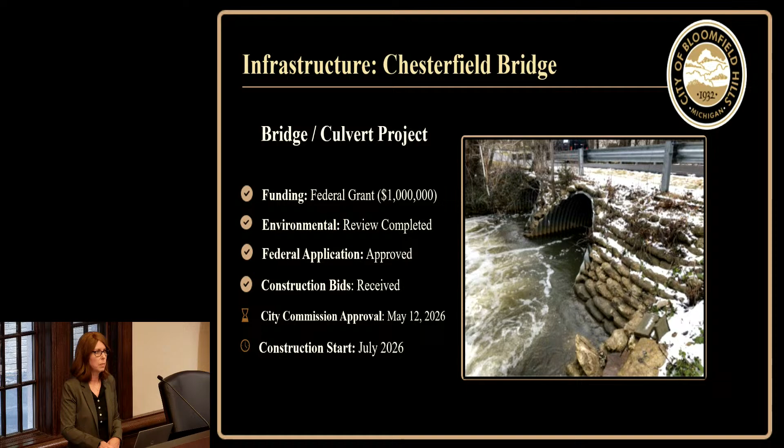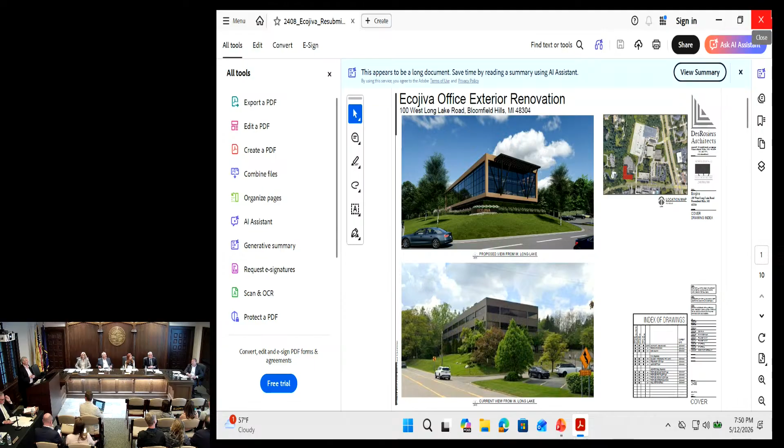These are going to have all insulated, beautiful insulated glass, which will have total energy efficiency. It's a curtain wall. And then the perimeter that you see, the tan color, is actually Alucobond. All these products are guaranteed for life.

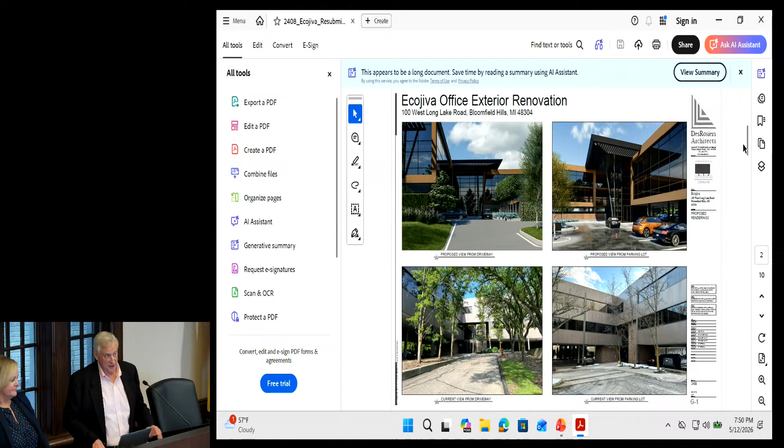And I always say that with a joke, because for some of us, life is different. I'm just kidding.

So we have these beautiful louvers that correct the architecture. The whole idea was to bring this building into 2026 veneer, and in my agreement with my contract, I'll never forget when I wrote it to the owner, I said my goal for you is that when people leave this intersection, they only remember this building, which is a good sales pitch.

Anyhow, so before, you can see the pictures on the left, we were very careful to show before and after. So these are the new views. It's a brand-new atrium, three-story atrium, all glass.

I think there's not too many other shots, we don't want to confuse anybody. Those are the same views before, and you can see that. But the building is the exact same use, same plan, nothing's changed, except we hope to lease it out big time, as soon as possible.

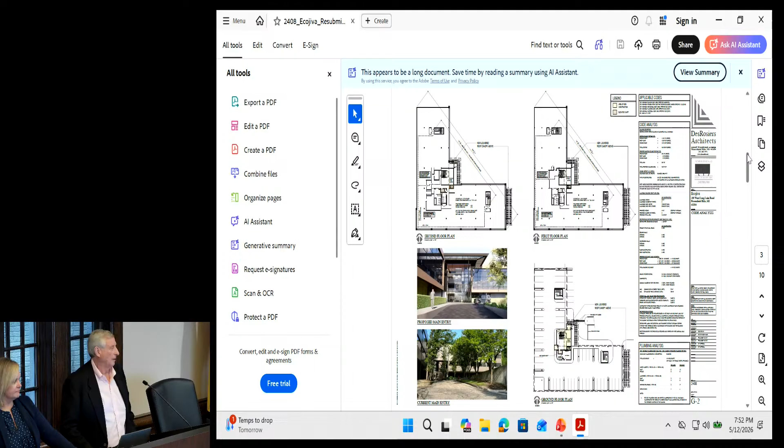I have a question. Sure. You're adding some floor space. We actually added no floor space. It's 40,000 square feet, a little bit in the atrium. But what is that, won't be used for office space? No, that's where you'll enter the building. Oh, we also added a brand new elevator, it actually has 2 elevators now, which is great.

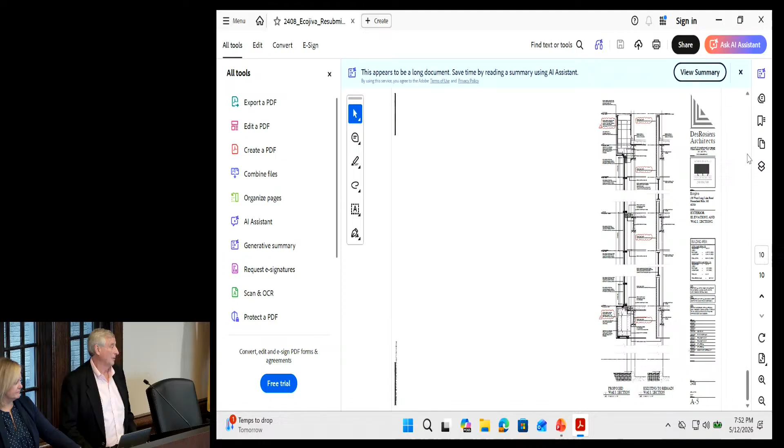So we're just hoping that everyone will work with us and want to make this an exciting part of your new, I call it rejuvenation venture, because that's what I think you're trying to do, based on all the things that happened through COVID and so forth. It's amazing, so we hope that you'll work with us on this.

Do we have any questions or comments? No, I think it aligns well with the spirit of what we're trying to do, and it's an existing use, and I really don't see any issue with it. I agree.

You know, that building is built for some smaller office. That building will fill up in a minute, it's over 40 years old. Yeah, because there's the JFK building to the north, which is empty, that's the one with the broken windows where the birds are running into the windows. And this is exactly what office should be like in town.

I appreciate it, thank you. That's our goal. Do we have a thank you.

Motion in response to the petitioner's request for a waiver from the moratorium for an architectural and facade improvement to an existing structure located at 100 West Long Lake Road? Do you want any comment first to see if anybody's got a comment? Does anyone in the audience have comments? I move. Second. All in favor?

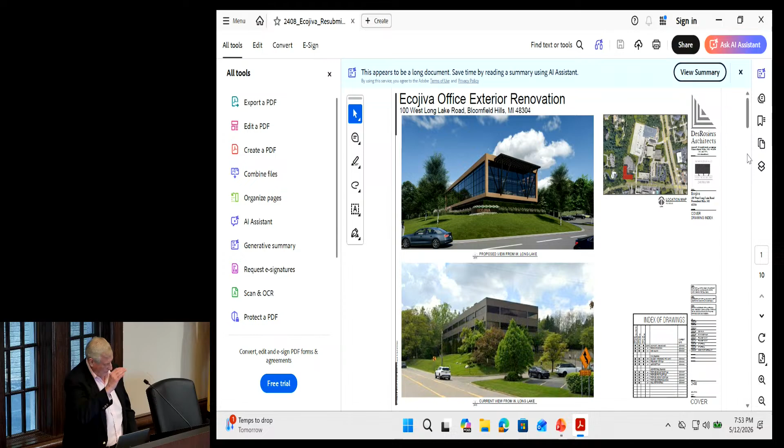Aye. Thank you very much. It's a pleasure, good luck with your project.

That brings us to item 6. The commission will hear a presentation from Oakland County Road Commission regarding the Lasher Road and Hickory Grove Road intersection. Dave? Looks like Jeff O'Brien and traffic engineer Alex Rosinski are here to discuss some options of improving the corner at Lasher and Hickory Grove.

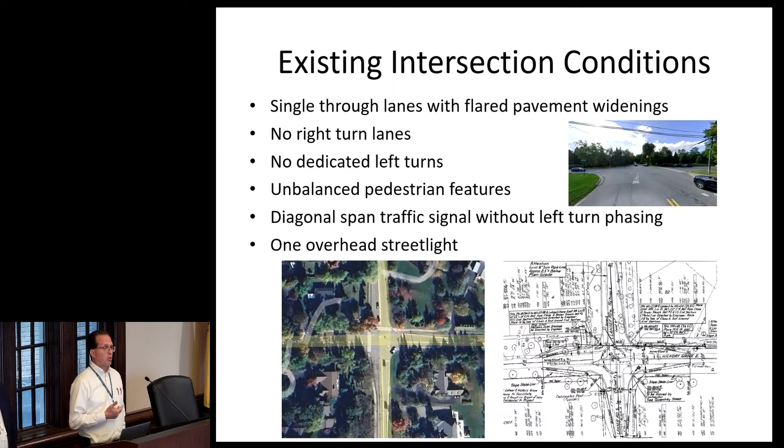It is a diagonal traffic signal today, essentially just red, yellow, green, with no left turn phasing at the intersection, and there's one overhead street light at that intersection.

The issues here at this existing intersection, from reviewing the actual operations, we observe a left turn crash pattern—northbound to westbound and westbound to southbound type crashes. These left turn or angle, head-on type crashes are the worst sort of crashes. Folks can come through on the green and strike a left turning vehicle, creating potential for higher injury type crashes.

We've had some reported intersection queuing—queues from eastbound Hickory Grove in the AM peak, and southbound Lasher in the PM peak. Some approaches queue up during those peak time periods, morning or afternoon. There are also reports of some cut-through traffic in nearby subdivision roadways.

The old signal today is a diagonal span signal, and it's not the current standard. That's partly from a worker safety perspective—workers need to get physically into the middle of the intersection to service the signal—as well as from a visibility perspective for the motoring public and pedestrians. This signal just isn't in the right spot visually.

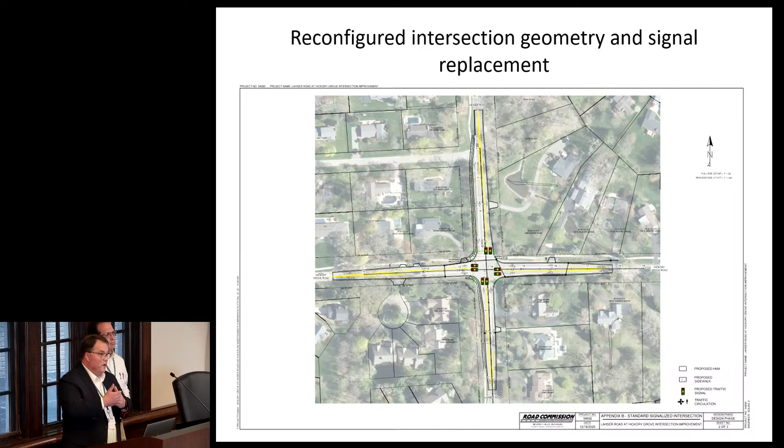That box span signal reduces red light running at a signal. People see it further away, and subconsciously they start braking before they get into that intersection, which helps reduce that red light running. RCOC made that choice roughly about 20 years ago to start installing box span signals.

Getting into some more of the details with that reconfigured intersection geometry, we estimate roughly 200 feet of storage. Once we get into the design, if this is the chosen alternative, we'll make the determination of how much left turn storage length is needed on each approach leg, based on full intersection turning movement counts and that type of operations.

We are not planning on having dedicated left turn phasing, meaning there will not be a left turn arrow at this intersection. We don't estimate that the demand is sufficient enough right now to meet that. We'll evaluate that once we get turning movement counts, but right now we are not planning on having that.

So you're having a left turn lane, but no left signal? Correct. It will just have that sign with the left turn only, and people will turn into gaps at that intersection.

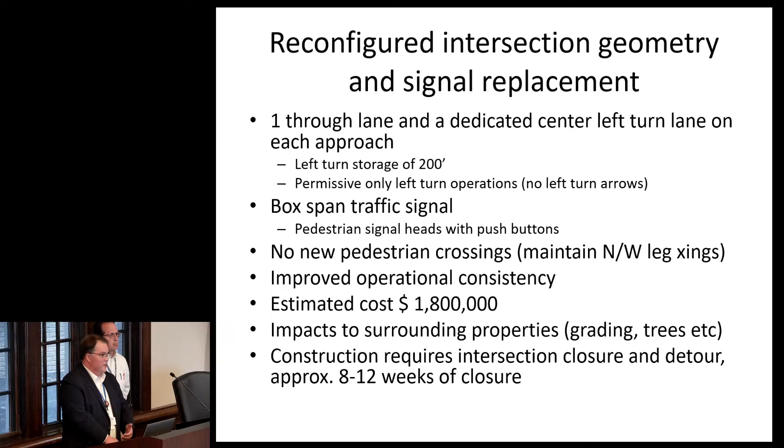The next option is a compact roundabout. This option puts a small island in the center of the intersection. You will have divider islands coming into it. It is a single lane roundabout. That center island is a small raised pavement area that large vehicles, articulated vehicles, and school buses could mount to complete the circular motion to make what we would consider a left-hand turn. That is how that is designed on these compact roundabouts. They're designed to reduce speeds through the intersection to about 15 miles an hour—no different than any other larger roundabout, just in a smaller configuration.

Like I said, single lane roundabout, it will remove the existing traffic signal. This entire project would remain inside the existing footprint of the intersection. It would utilize the same drainage system that's out there today. It slows traffic speeds down through the intersection. There are no proposed new pedestrian crossings. The crossings on the north leg and the west leg would remain. Obviously, we would bring those into ADA compliance. It improves operational efficiency through the intersection—that's the big plus of a roundabout versus a traffic signal.

It minimizes impacts to the adjacent properties. The estimated cost is about $525,000. It would require a closure and a detour as well, but we estimate the construction time is about 6 weeks.

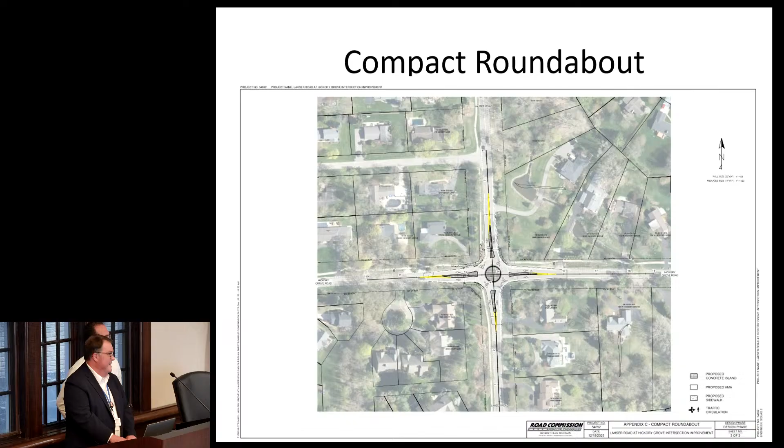One slide I like to present when comparing a roundabout to a traditional intersection is conflict points. At a traditional intersection, there are 32 vehicle-to-vehicle conflict points, and 24 pedestrian-to-vehicle conflict points if there are 4 crossings. This particular intersection only has 2 crossings, so that pedestrian-to-vehicle conflict gets reduced to 12. Compared to a single-lane roundabout, there are 8 vehicle-to-vehicle conflict points and 8 vehicle-to-pedestrian conflict points. Again, with 2 crossings here, that pedestrian-to-vehicle conflict point gets reduced to 4.

So when we talk about particularly vulnerable road users, your pedestrians, your bicyclists, the conflict points are significantly less in a roundabout than at a traditional signalized intersection. These are some of the things important to us at RCOC, making sure we reduce these potential conflicts as much as possible when evaluating improvements at an intersection.

A roundabout eliminates the right-angle, head-on, left-turn crashes. If you do have crashes at a roundabout, they tend to be low speed and less severe. At traditional intersections, you do have those left-turn conflicts, although by adding that left-turn lane, those opportunities tend to be a little reduced, because that left turn gets moved out of the way, through traffic isn't delayed as much, so they don't feel that urgency to get through the intersection on the yellows, on the reds, when people may be turning left.

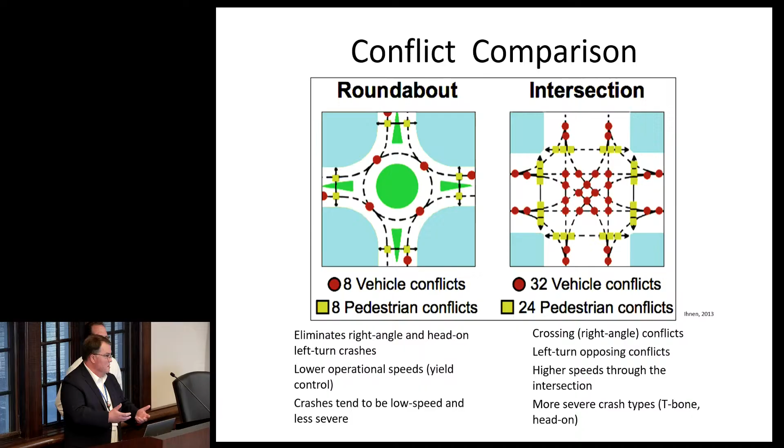That's basically the summary of the conflict comparisons between the two types of intersections we're proposing here. Everyone's got a benefit, everyone's got some cons, so it's up to you guys to voice your opinion as to what you like on each one, and I'll turn it back over to Jeff.

So depending on comments received, what does implementation look like? We understand the intersection does need an improvement to occur. If a signalized option moves forward, ultimately work at the intersection cannot occur during the MDOT project proposed on Woodward, which is scheduled to start after Dream Cruise of 2027.

Also, any work in the intersection—I would assume at this point they'd like it done during the summer, during school recess, to not impact schools, buses, access, that sort of thing. We know that MDOT's Woodward project is going to carry into 2028. We don't foresee an opportunity to construct a signalized intersection in 2028 as a result, so we'd be looking at a 2029 construction schedule for a signalized option.

Can I interrupt just for a second? Yeah, absolutely. You said it takes 8 to 12 weeks to put a signal in, and they aren't starting construction on Woodward until 27? A year from now? Yes. So why isn't there a 12-week period that we could put the signal in? So, don't rush, absolutely, don't rush.

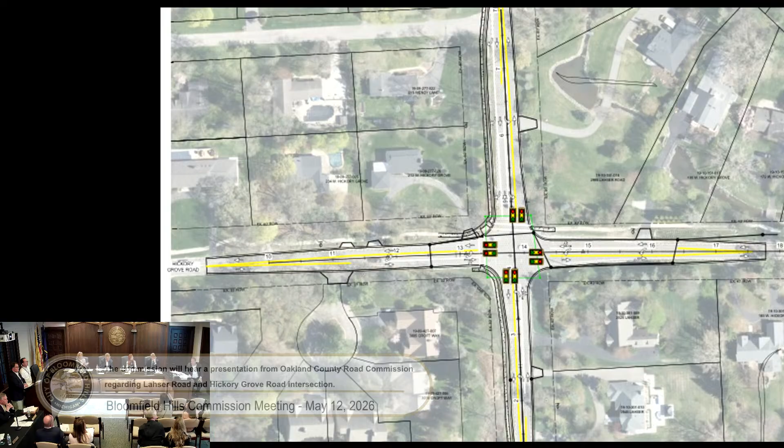So can you just tell us what's existing and how much more you need? Well, on this particular one here, we really haven't identified any additional right-of-way needs. What I'm saying is that at the end of the day, I may need a temp easement. That would be like a temporary easement, for grading, but from a permanent acquisition, it does not appear that we would need much, if anything. Good, great, from a permanent perspective.

But also, folks who have trees in the right-of-way, walls, fences, that sort of thing, those would be removed as part of the project. Obviously they'd be upset, we may have some unhappy homeowners at the end of the day as a result. Not something we can't work with the adjacent property owners on, but at the end of the day we don't think we need a lot of right-of-way acquisition.

I've done a number of these types of projects in the past, and some need more right-of-way than others. Yeah, you had the word right-of-way there, I thought you were gonna really take a house out. No, no, that was not the original plan. The other component too with right-of-way, when we're talking signals and signal poles, is foundations for those signals and setbacks from those signals from the back of curbs.

So until we get into doing a design, finding out where the curbs are actually going to be, where our sidewalks are going to be, where things are actually going to lay. Well, that's true with the roundabout too, right? No, not with the roundabout, because the roundabout's gonna stay in the existing footprint of the intersection.

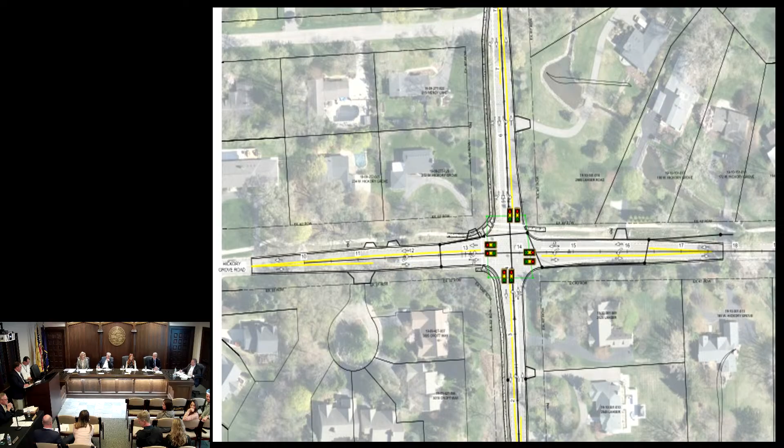I'm Kenya Vincent, 100 West Hickory. And the gentleman with the adaptive light, what was your name and address? My name is Tom Westman, I'm at 2839 Colonial Trail. Just for sake of clarity, it's the tree in the farthest right corner that she's referring to.

Is that in the right of way? In the right of way. Can you handle it? Yes. My name is Tracy Rumps, I live at 295 Applewood Lane.

I'm very concerned. I've got a son that goes to North Hills Middle School. He's scared to cross the intersection. There's been several near misses there. He's been honked at by cars. It's a really scary thing as a parent to have your kid go out there. I really think there needs to be a crossing signal similar to what's down at Lahser and Long Lake. That's what's needed, so the cars know when to stop and the kids know when they can cross properly. I'm not in favor of the roundabout - it's going to increase the amount of traffic flowing through this area. This is a residential area, and for children coming to and from North Hills, it's going to make it more difficult for them to cross if there's a roundabout. So definitely not in favor of that.

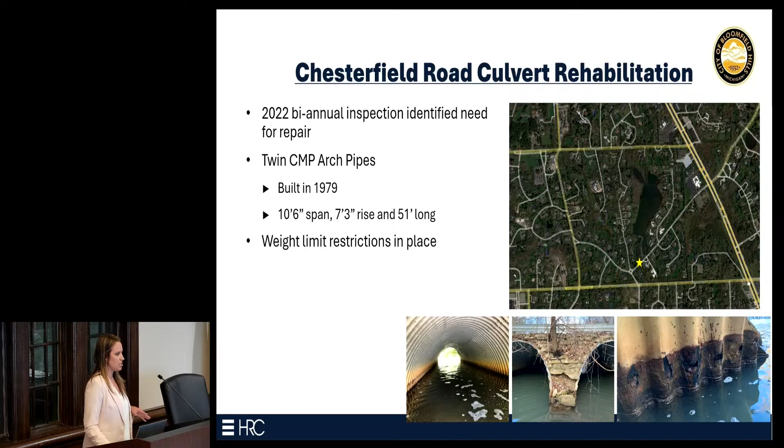Thank you. Good evening, Leah Michaels with HRC. Sandra stole a little bit of my thunder during her budget presentation earlier, so most of the stuff you already know, but I just wanted to quickly refresh everyone's memory on how we got here. The Chesterfield Road culvert, there are 2 twin culverts along Chesterfield that we started talking about back in 2022. The city does biannual inspections of these culverts. Back in 2022, we identified that they were in need of repair. Currently, there are weight limit restrictions along Chesterfield Road and deterioration within the culvert.

Back in 2024, the city was able to secure funding, $1 million from community project funding, to rehab this culvert. So for the past 2 years, we have been going through environmental reviews and other processes that came as a part of that money, and recently we put the project out to bid. We received 4 bids on the project. So that's what we're here to talk about today, to recommend that this contract get awarded to Michigan Bridge Construction, who was the low bidder on the project. We followed up with them and found that they are qualified to do the work and have done recent work in the area.

To speak just a little bit to the project costs, as we mentioned, there is a $1 million grant amount, so this is kind of the budget we have. The environmental review is complete, and that grant amount did fund that review process. There's also a budget for city administration, which is Sandra's time for invoicing and work she has to do with the grant. The construction bid came in at $546,426.08, which is similar to where we hoped the bid would come in. We also have a budget for construction engineering and contingencies. Right now, we're estimating the total project cost to be a little over $700,000, again in line with and below the grant amount the city has to complete this project.